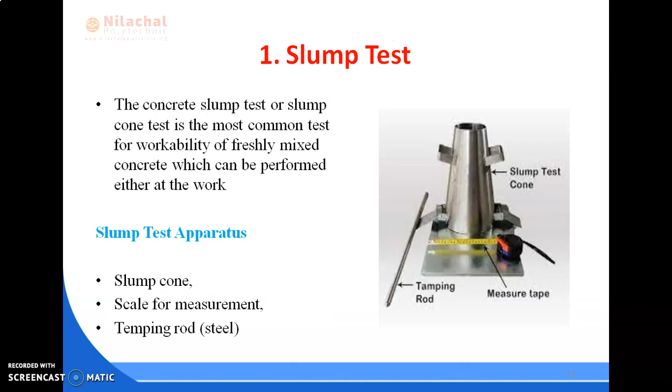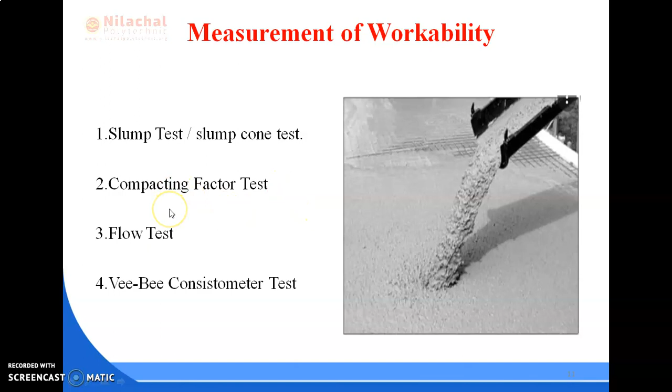So among the tests which are available for the measurement of fresh concrete, like slump test, compaction factor test, flow table test, Vee-Bee test, the first one, the slump test or slump cone test, is already discussed. So in today's class I am going to discuss the second one. This is the compacting factor test.

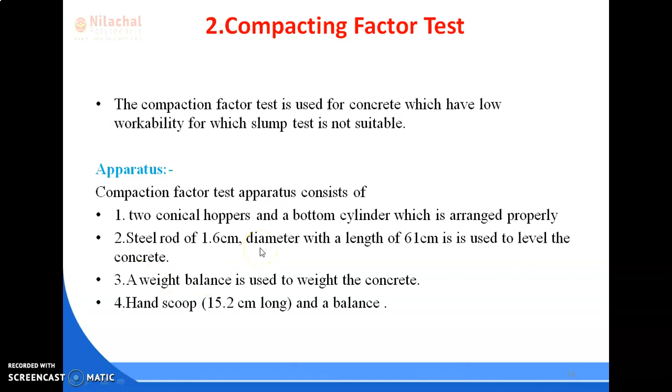Also apparatus like a weighing balance, then a tray for mixing purposes. So let us discuss the total procedure. The sample of concrete, that means the fresh concrete to be tested, is placed in the upper hopper up to the brim, and the trap door is opened so that the concrete falls into the lower hopper or bottom hopper.

Then the trap door of the lower hopper is opened and the concrete is allowed to fall into the cylinder, and the excess concrete remaining above the top level of the cylinder is cut off with the help of plane blades, and the net weight of concrete in the cylindrical mold is taken. After that, the concrete is fully compacted and the weight is determined by filling the cylinder in 3 layers, and each layer is tamped 25 times.

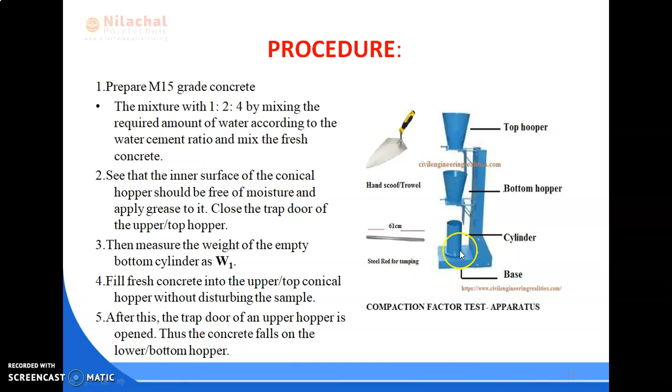Then at last we measure the weight of the cylinder with fully compacted concrete, and this weight may be W3. The previously measured partially compacted concrete is W2, and the empty weight of the cylinder is W1. This cylinder is detachable. Whenever necessary we fix it, otherwise we can take it out for the measurement.

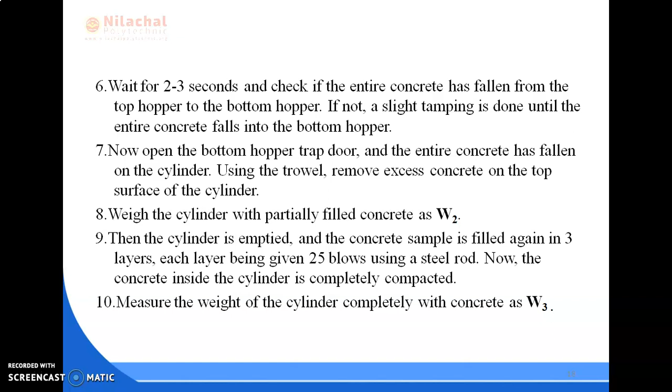So this is the total procedure, and applying the formula W2 minus W1 by W3 minus W1, we can find out the compacting factor, and by knowing this value we can determine the workability of fresh concrete.

Next is the flow test or flow table test. This is the third test. It is also used to measure the workability of concrete. This test basically gives an indication of the quality of concrete with respect to consistency, cohesiveness and proneness to segregation. In this test a standard mass of concrete is subjected to jolting, and the spread or flow of concrete is measured, and this flow is related to workability.

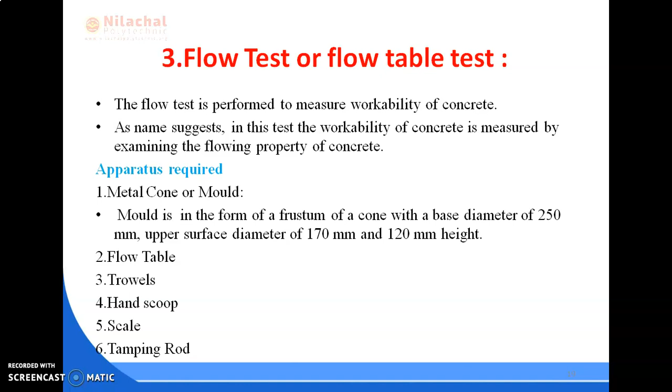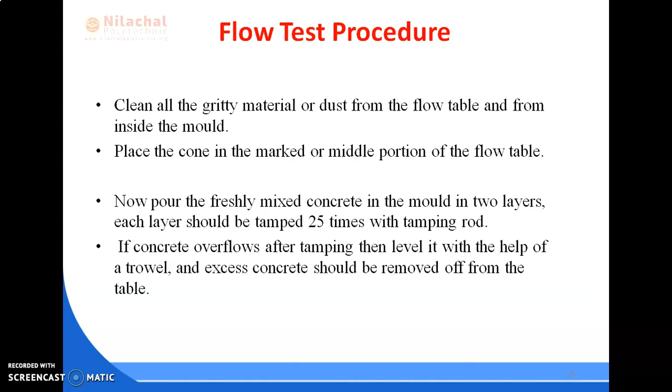The flow table of diameter 76 cm is cleaned of all gritty material and is wetted. The mold, of base diameter 25 cm, upper diameter 17 cm and height of 12 cm, is kept on the center of the table and is filled in 2 layers. We have to fill the fresh concrete in 2 layers.

Each layer is tamped 25 times with the tamping rod and the top layer is rodded evenly, or we have to plane it. The mold is lifted vertically upward, and the concrete stands on its own without any support.

And the table is then raised and dropped 12.5 mm 15 times in 15 seconds. We have to rotate it. This flow or spread of concrete is related to mobility and workability. Next, after rotation, measure the diameter of the spread of concrete in about 6 directions and note down the average. We have to note down the average and it should be 0 to 150%. So this is the total procedure of the flow table test or flow test.

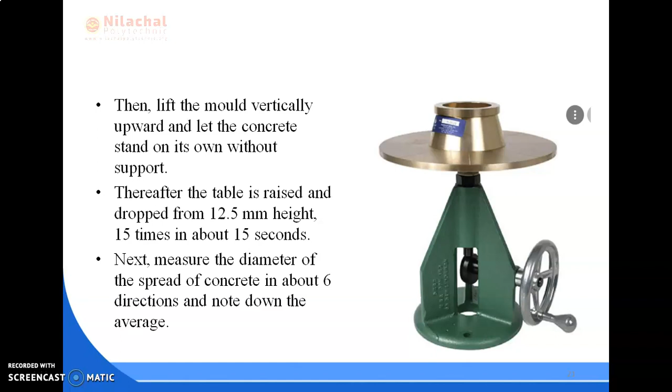And next is the Vee-Bee test. The last test is the Vee-Bee test. It is a pure laboratory test to measure workability of fresh concrete. It is also known as the Vee-Bee consistometer test. Here the time required for the shape of concrete to change from slump cone shape to cylindrical shape in seconds is known as Vee-Bee seconds. In this test, the consistency of concrete is measured in terms of Vee-Bee seconds.

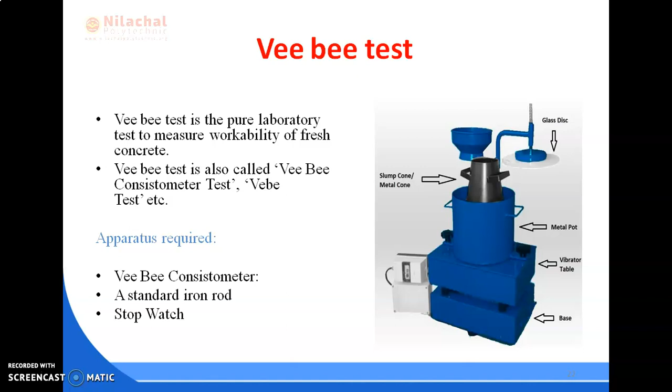So fill the concrete in the slump cone in 4 layers. Each layer should be 1/4 of the height of the slump cone, and we have to tamp each layer using the tamping rod 25 times. After the last layer has been tamped, level the surface with a trowel.

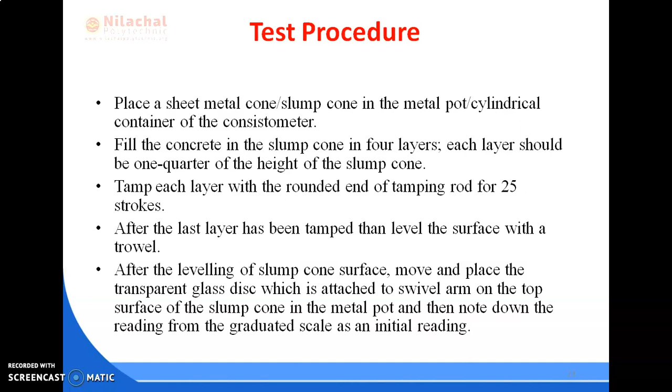After leveling the slump cone surface, move and place the transparent glass disc which is attached to swivel arm on the top surface of the slump cone in the metal pot, and then note down the reading from the graduated scale as an initial reading. After that, we have to remove the slump cone slowly and carefully in the upward direction and wait till the concrete settles in a new position.

Then lower the transparent glass disc on the top of the concrete and note down the reading from the graduated scale as a final reading. And determine the slump value by taking the difference between the final reading and initial reading, which are taken from the graduated rod.

Now switch on the vibrator and start the stopwatch, allowing the concrete to spread out in the metal pot. The vibration should be continued till the concrete surface completely adheres uniformly to the transparent glass disc. Note the time taken for this remolding process, and this time is recorded in seconds. This is known as Vee-Bee seconds. A low Vee-Bee time means high workability.

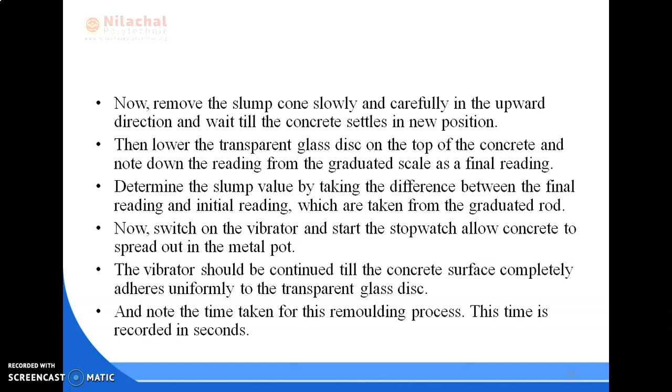So these are some procedures available to find out the workability of freshly mixed concrete. The last and most important thing is requirements of workability. So let us discuss the major requirements of workability. The workability of the concrete must be such that it can be properly mixed, placed in the formwork and properly compacted with less effort without the chances of segregation and bleeding.

Next, the workability is chosen based on the compacting equipment, section size and reinforcement concentration, and it is high for sections that are heavily reinforced or when they have inaccessible parts. Basically, the requirements of workability should be changed with the situation. The minimum workability with satisfactory placement and compaction must be followed. So these are some requirements of workability.

And with this, our chapter 4, properties of fresh concrete, is completed, and next lecture we will start a new chapter.